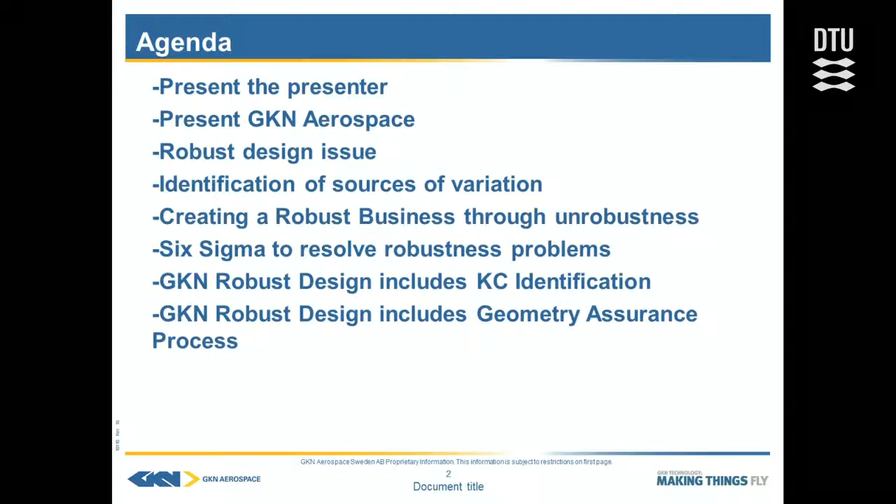So, Sören Knuts is my name, and this is the agenda for this talk. I will briefly present myself, and then GKN Aerospace, and then I will bring this back to basics regarding robust design and the robust design issue and identification of sources of variation. Then I will discuss our business where we see that we are creating a robust business through unrobustness, and I will tell you more about what that means for us. Then we have Six Sigma for resolving our robustness problems. And then we see the GKN Robust Design that includes key characteristics identification, but it also includes geometry assurance process.

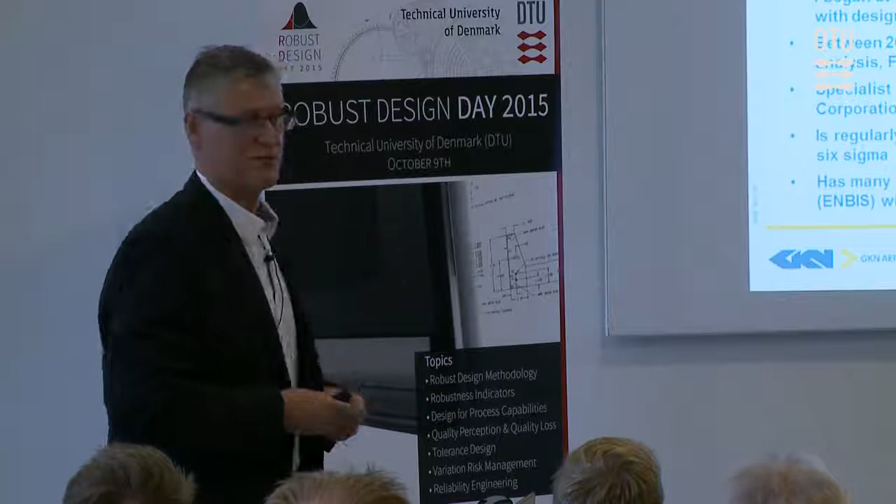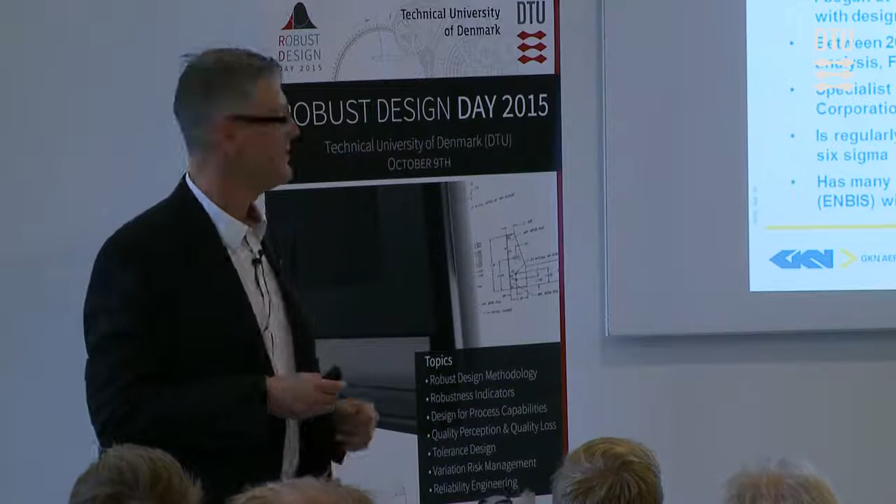But then I came to Trollhättan. I started with space propulsion, and there I also got very interested in quality issues and reliability. After being quite deeply involved in the development of the Ariane 5 nozzles, I continued to Saab Automobile, also in Trollhättan. There I continued working with risk analysis, FMEA, statistical analysis, and I started also with design for Six Sigma. Then I went back to Volvo Aero, where I started in Trollhättan, and continued more or less with the same thing, and then I became their specialist in design for robustness.

And now we are GKN Aerospace since 3 years back, a British company that I will talk about next. I regularly run master thesis works and student projects in robust design and Six Sigma, and I have also participated quite a bit in a European network in business and industrial statistics. There I have met a lot of people from Novo Nordisk, so I know they have a lot of good statisticians.

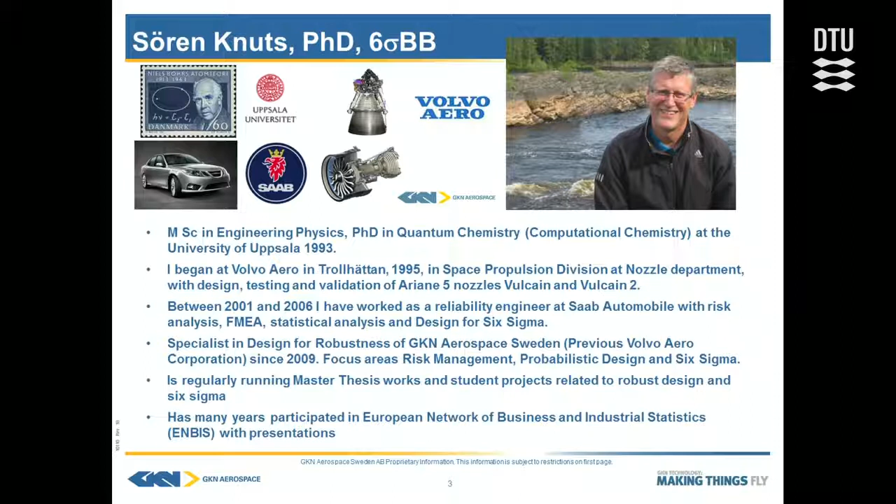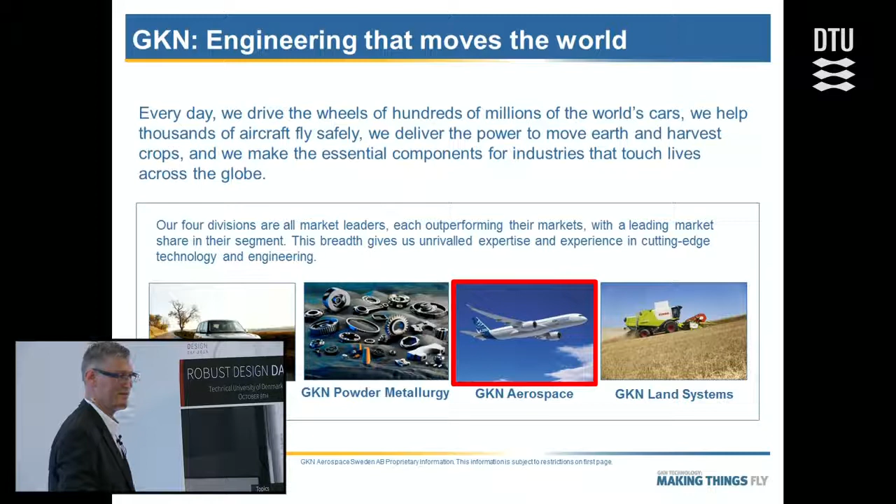So, GKN: engineering that moves the world. Here you can see that there is a great variety of businesses that we have, where aerospace is one business, and we are supplier to bigger companies. I guess Jaguar Land Rover is one, and Volvo is another one, I know.

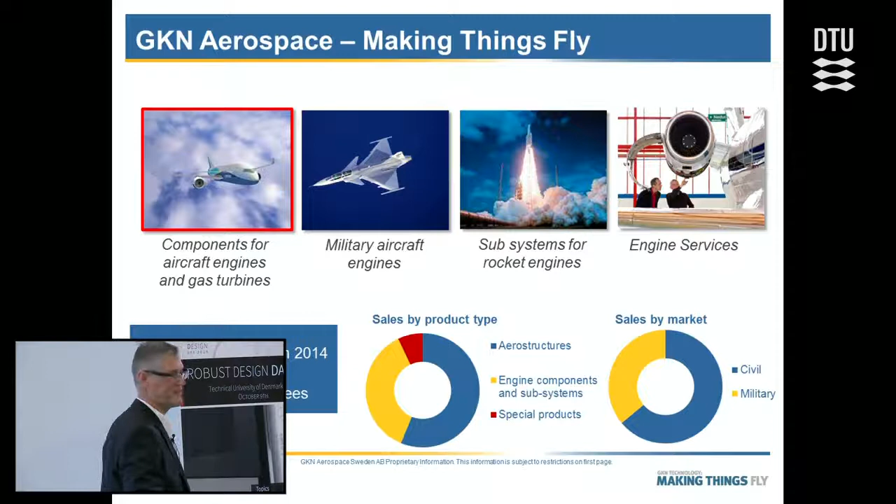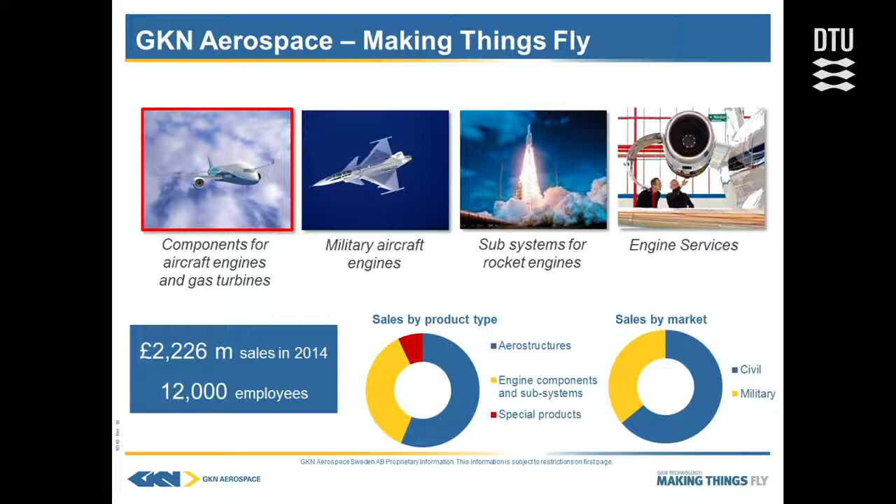And if we go to GKN Aerospace, making things fly, we see that there we also have a great variety of different businesses. I will mostly focus here on the commercial aircraft engine side, but we also have military aircraft, space launchers for Ariane, for instance, and engine services. We are about 12,000 employees, and in Trollhättan we are about 2,000 people.

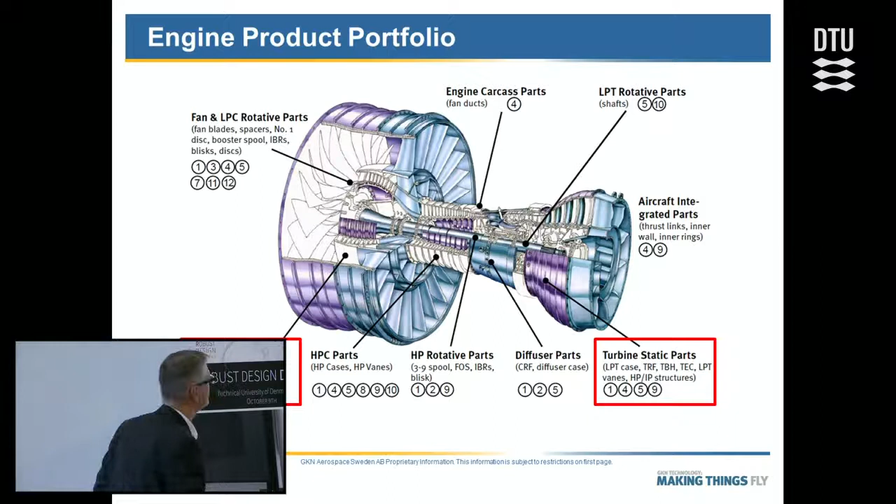Here you can see one of these commercial engines. We have specialized in having two parts of structures: one on the cold side, where we have the fan static part, and one on the hot side, where we have the turbine static part. So we do not have the moving parts—well, we have some moving parts, but these are the structures we have specialized on and made a very good business on, where we have more or less 90% of all the large commercial aircraft engines.

So when you are flying, you certainly are flying with components from GKN Aerospace. And then you want it to be very reliable, of course. So reliability is a big issue, of course, but robustness, that's where we are going to earn our money.

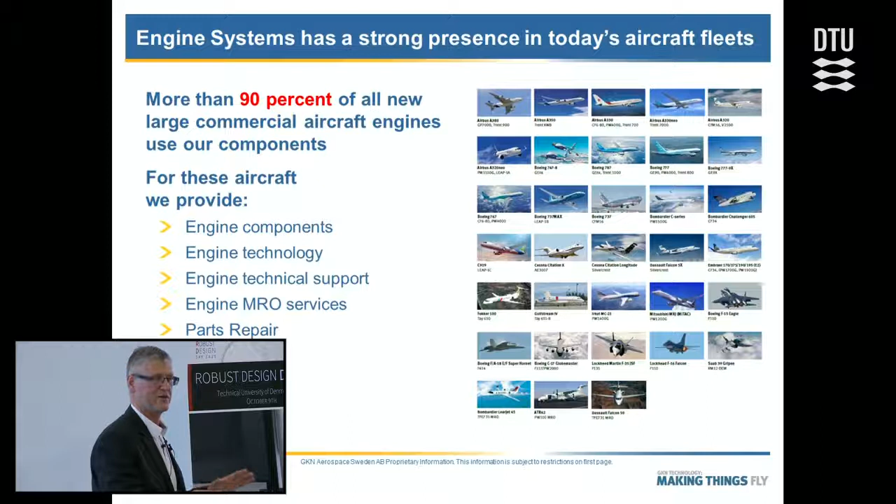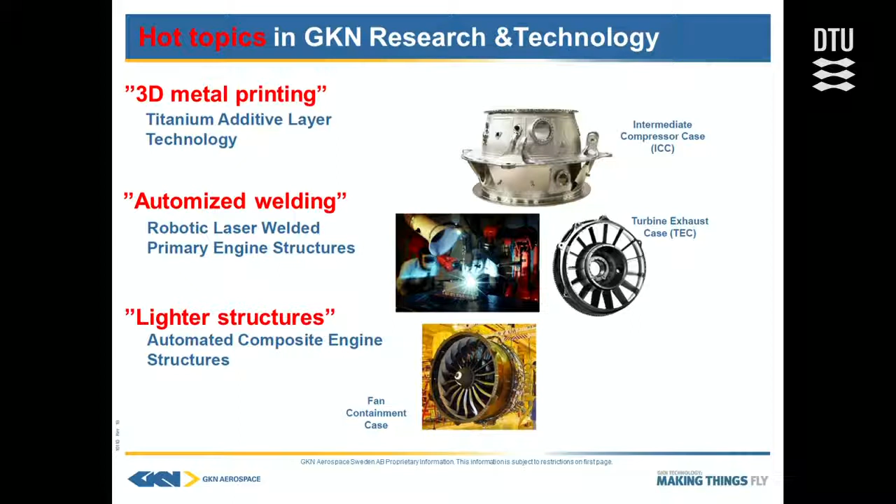And here you can see the hot topics within GKN Research and Technology. You can see that 3D metal printing, or building up parts by additive layers of metals, where we are mostly welding—that is one important technology that we are building up. And we have the automized welding, welding with lasers—that is also a very important technology we are building up.

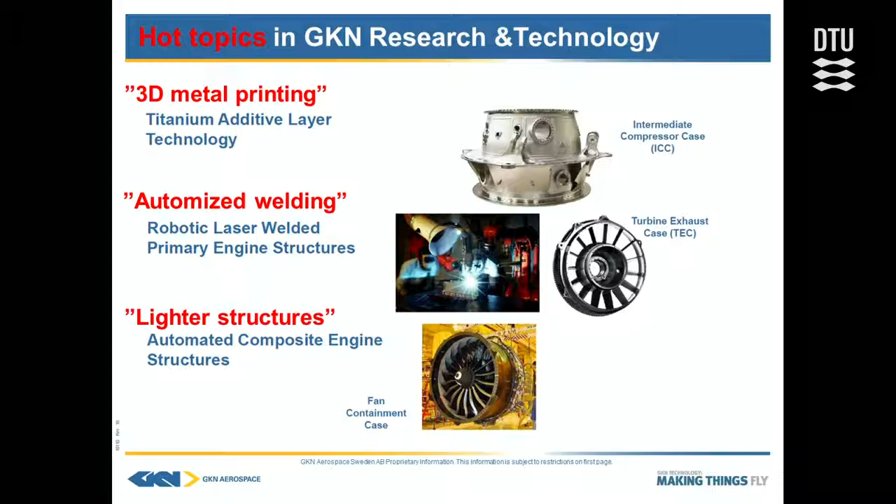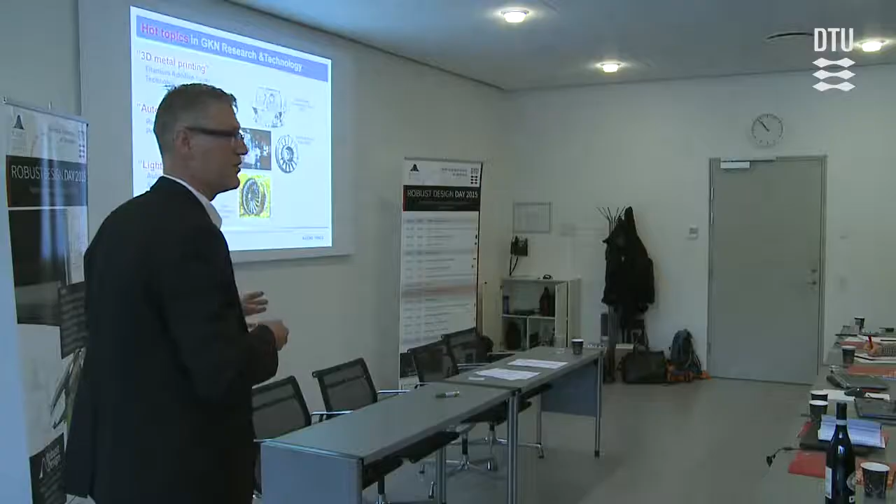And then finally, we have the lighter structures and introducing composite materials in engines. So far, I don't think there are so many composite materials in aircraft engines, but they are on the way. They have not yet matured enough.

So what is the robust design issue? The main issue, and I think that was touched on very much yesterday in the doctoral thesis, Martin.

This is very much what we have been trying to develop here for the last 7-8 years: can we design our products and processes so they are insensitive to sources of variation? But here it's very much to understand what this means for the type of business we are in, because it's not the automotive industry.

Here we have an industry with much fewer parts. It's not consumer parts in the same sense, but the high requirements we have in our business also put a lot of constraints on what we can do.

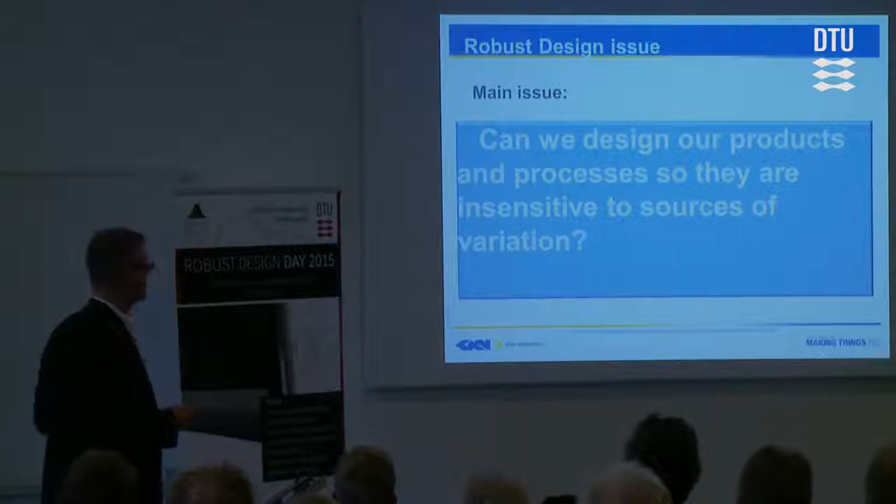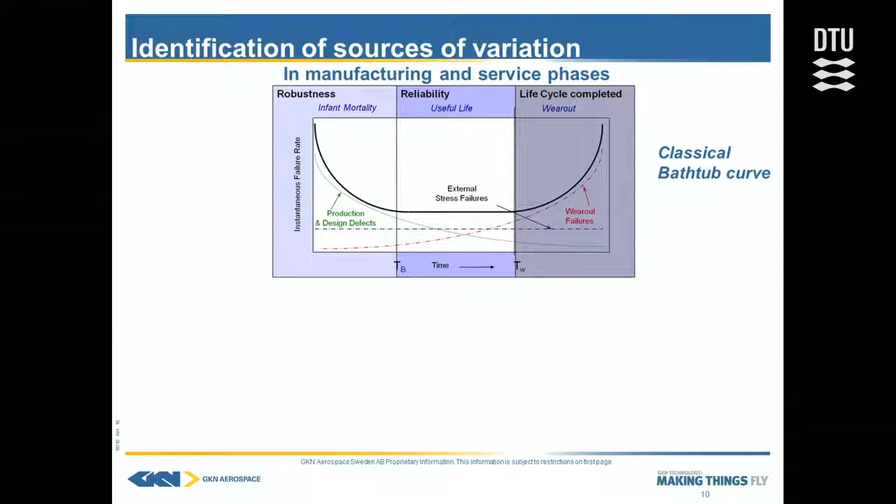If we look into this classical bathtub curve, we have divided it into three phases. The first phase we call a robustness phase, the next phase we have reliability, and then in the last phase, the wear out phase, we are not operating. So what we are determining there is rather to estimate the life of the parts, so we have margins.

A lot of focus is put on the reliability part, but when it comes to earning money and creating good conditions for our products, the robustness phase is what we have to focus on. I have been very much focused earlier on reliability, but I have to shift here.

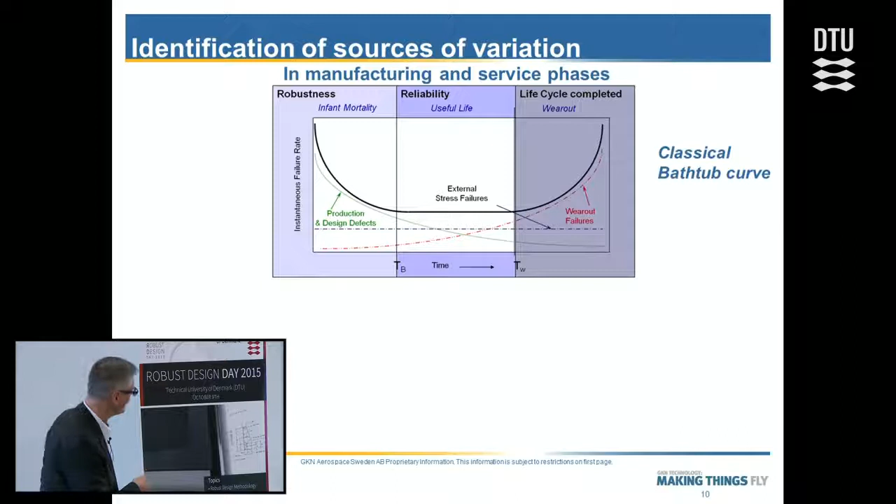There you can see typical noise factors related to these different phases, and manufacturing imperfections - that's really what we aim for when we are discussing robustness. The other noise factors you can recognize for typical consumer products regard external environmental load conditions and customer behavior.

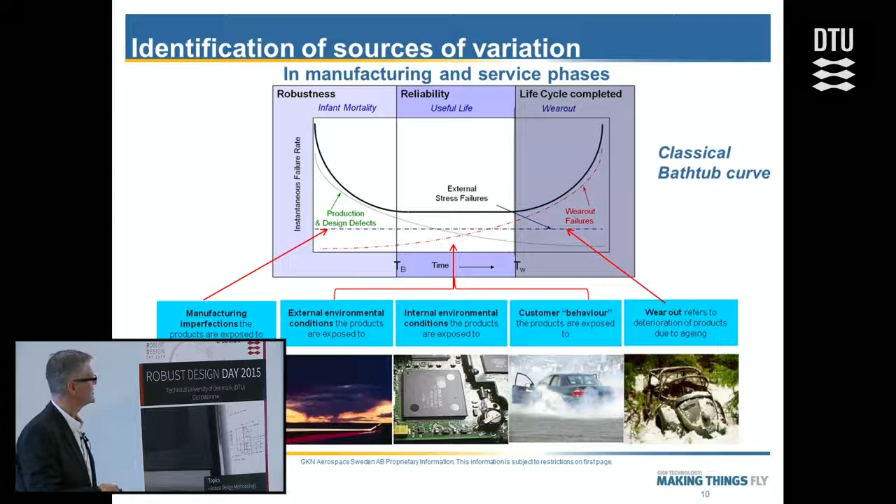So we continue with manufacturing imperfections. When we work on identifying these sources of variation, we see the type of problem that Martin was facing yesterday in his dissertation thesis was very much how can this be applicable in a simple way for the engineer. What we can see is that in our organization, we can talk about these tools, but what the engineer is doing is using FMEA, and in his FMEA he's not addressing the sources of variation. There we have the problems.

We see when we work with root cause analysis that these fishbone diagrams or Ishikawa diagrams are very fruitful in order to map out different factors.

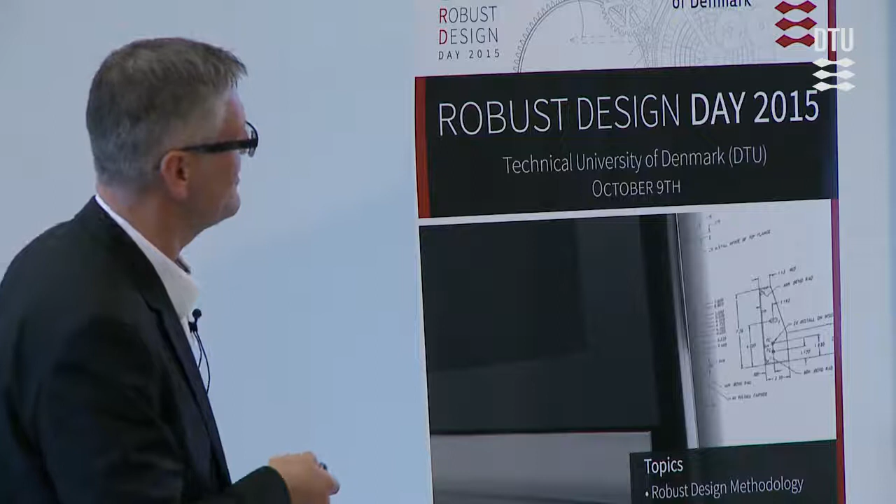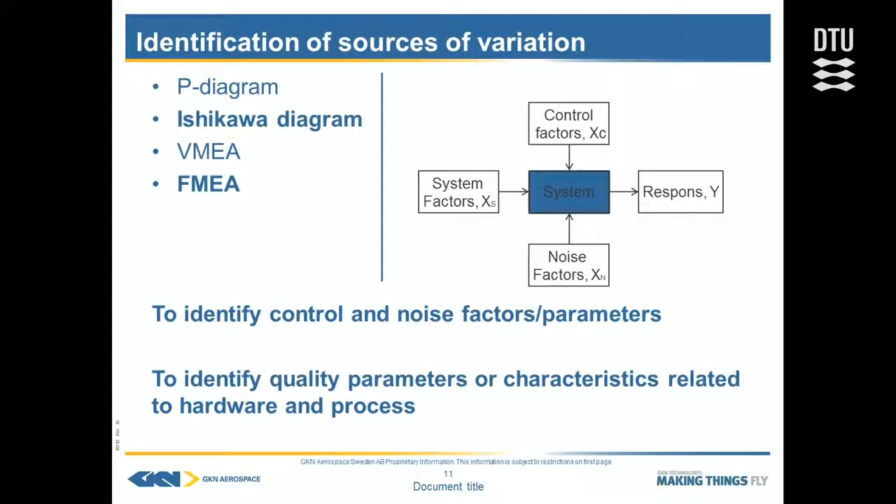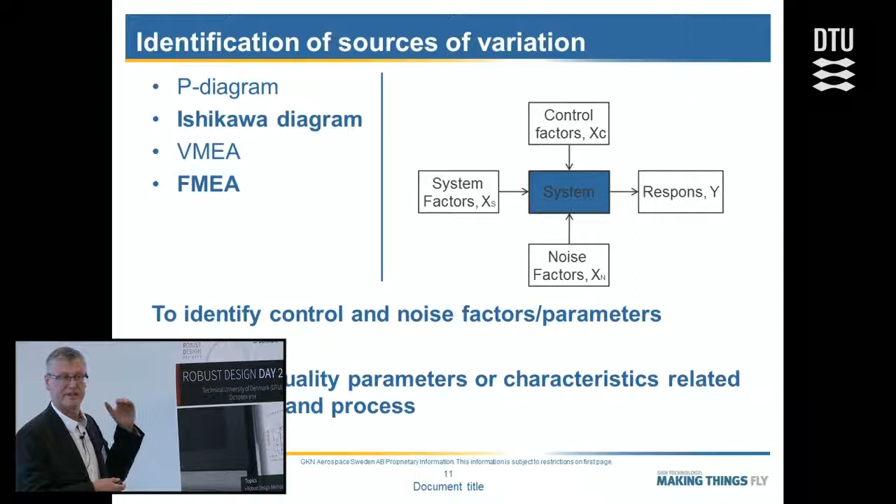What I have used here is really a P-diagram, and I think that's a good way of understanding what type of problem you are really facing, that you have to differentiate the factors in your engineering problem and understand the system you are studying. Then the question is very much about control and noise factors, but you can also talk about quality parameters or characteristics related to solving this problem for both hardware and the industrial process. So you have to connect these two.

The GKN design problem is very much this: to find the key product design and process parameters, but also to understand the voice of the process. There I would say we have the noise factor that we have to get more and more aware of - the tolerances that the process is creating. The tolerances we set in design are not always connected to what the actual process says. We have some big issues there to work with.

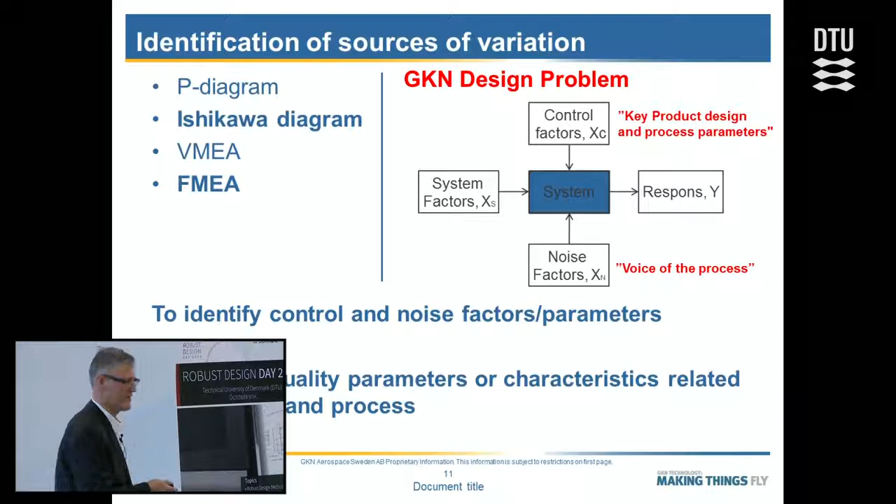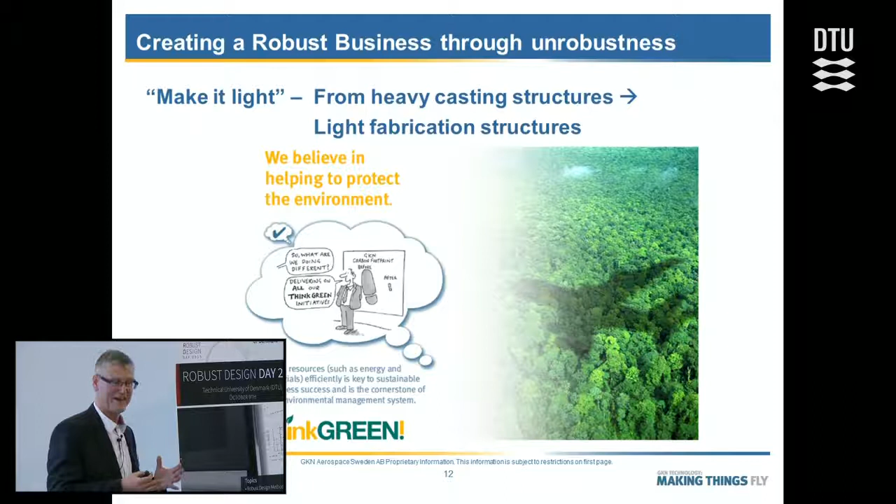So how are we creating a robust business on our products? We are actually creating unrobustness. And why are we doing that? That's kind of a strange thing, and I have gotten comments on that before - how are you thinking, you should do robust design, and now you make things unrobust.

But that's a competitive thing, because what we want is to go from these unit or one-piece castings that are very heavy and big to smaller pieces that we can control the weight on and get to a much lighter fabrication. And from this we can talk about 'make it light.'

And there starts our travel. We should provide light structures for our OEMs, our aircraft customers.

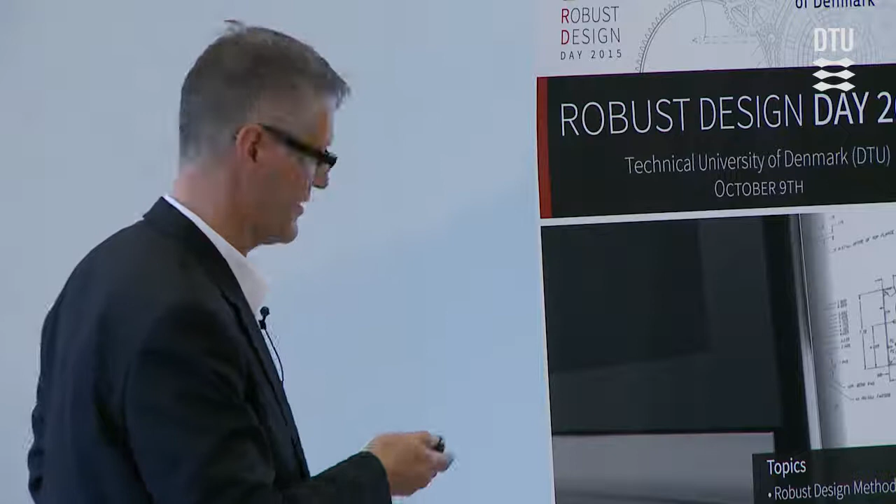So we have this Think Green initiative within GKN, and sustainability is one of these big issues concerning this. So what have we done? What we are doing is actually partitioning these big structures into much smaller parts.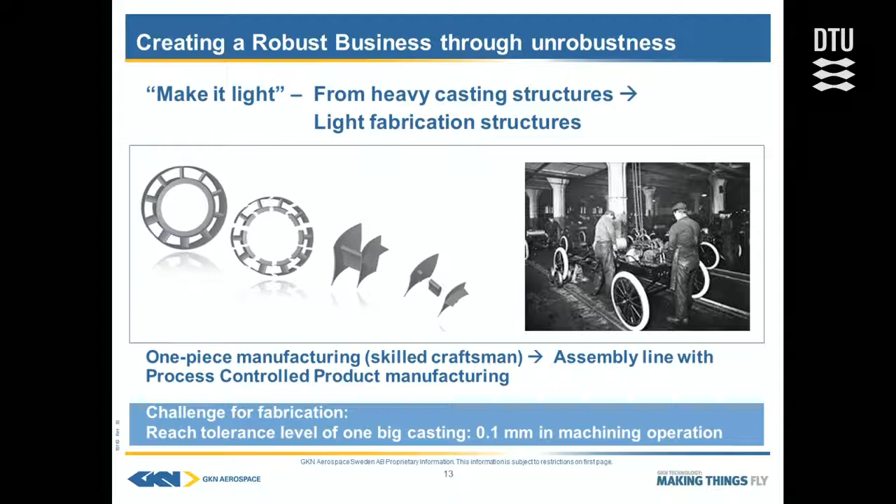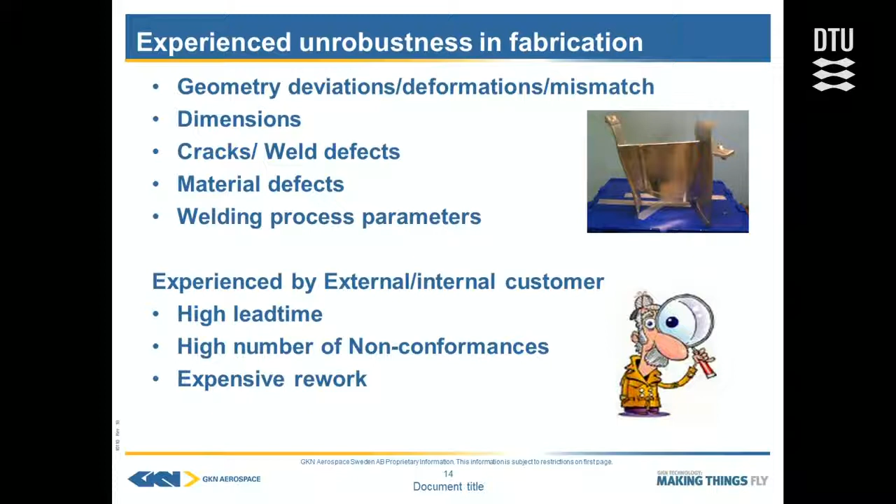So what type of unrobustness are we facing when doing this fabrication? What do we have to care about when developing our structures? We have to care about geometry deviations, deformations, and mismatch, and that comes very much from how we assemble all these small parts.

Then when we are welding, we get deformations from the heat-up of the material. So how can we control this? We are very good at simulating even welding, but anyway, we are not precise in how this is done.

So dimensions are important. In the welding, we get weld defects, cracks, that we have to control. We also have to show by inspection that we don't have defects in our welds. So it's very much about how we can show that our processes are defect-free.

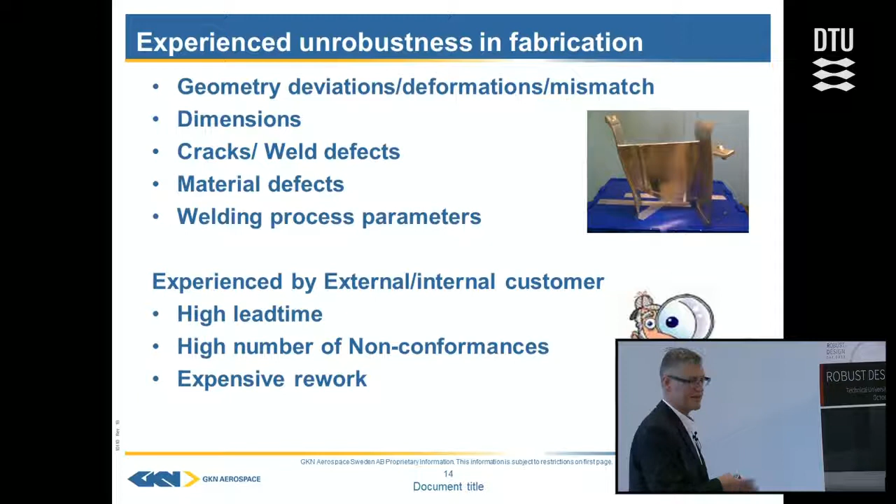Then it comes to the material that we are using. Castings have slightly worse quality than forgings and sheet metals. And then, of course, how are we controlling our process, all the welding process parameters that we are applying.

You can understand that this adds up to high lead times, a high number of non-conformances that cost a lot of money for us, and we also have expensive rework when we have to do rework.

So here it's very much about working with the manufacturing process at the same time that we have to work with the product. You can understand that we have gone from having no identification to now being very much into the identification phase, where we understand how different factors are varying together.

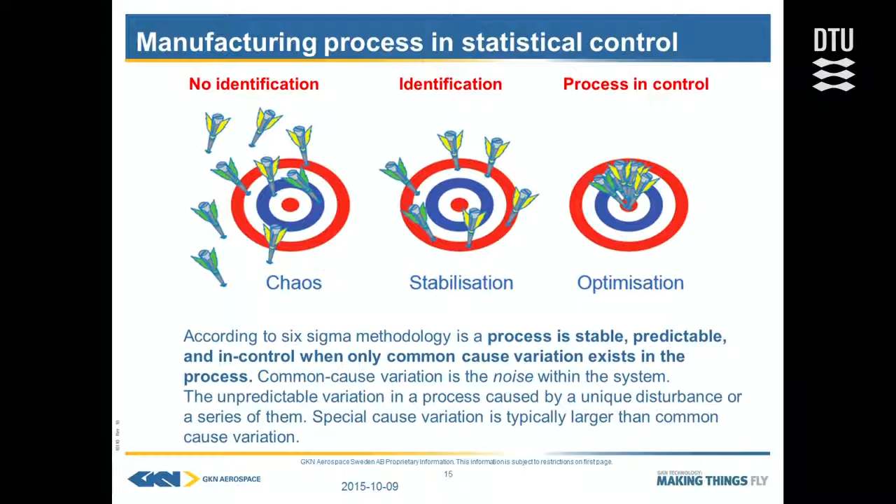But we have to go into process control. We have to get a very accurate description of how we can get robust products and processes. And here we also see that the Six Sigma methodology has helped us very much in the way of thinking regarding how we work with production processes in order to get this optimization happening.

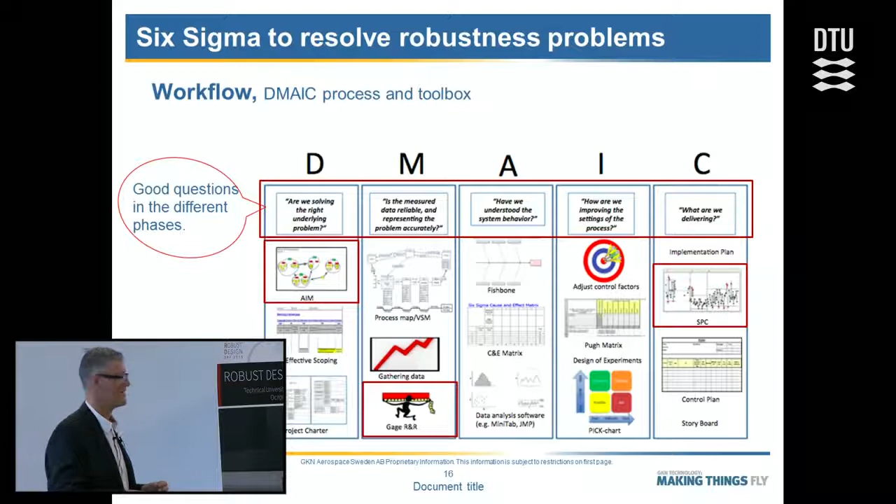I want to show you briefly the DMAIC process, which I think has some very good components that you have to get the engineer to understand when it comes to controlling the output of your process.

I want to stress the aim, where you have to look at the problem. You have to question whether you have defined your problem in a very good way so you can solve it. What we mostly see is that you have not looked through the context or made the analysis - you try to find simple solutions to the type of problems you are seeing.

That is something we question and work with in a very good way in this Six Sigma methodology. And then we also see that when it comes to working with measurements, we haven't really made our exercise concerning the measurement system analysis. That is also something we are working to correct.

And then, of course, to really study the process and study how the deviation looks, so we actually reduce the variation in a wished way.

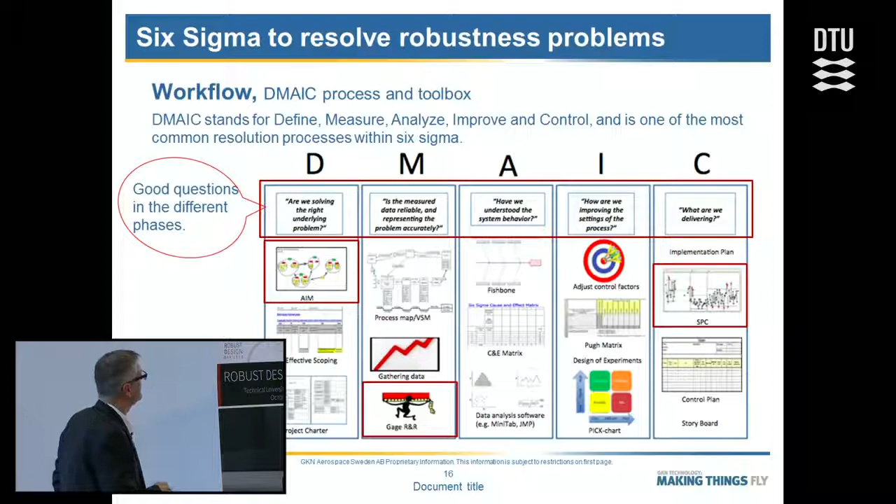I want to connect here from the sense of measurability to the concept of key characteristics. In the academic literature, this is a quantifiable feature of a product, its assemblies, parts or processes whose expected variation from target has an unacceptable impact on the cost, performance, or safety of the product. That's a reference to Anna Thornton, who is here today.

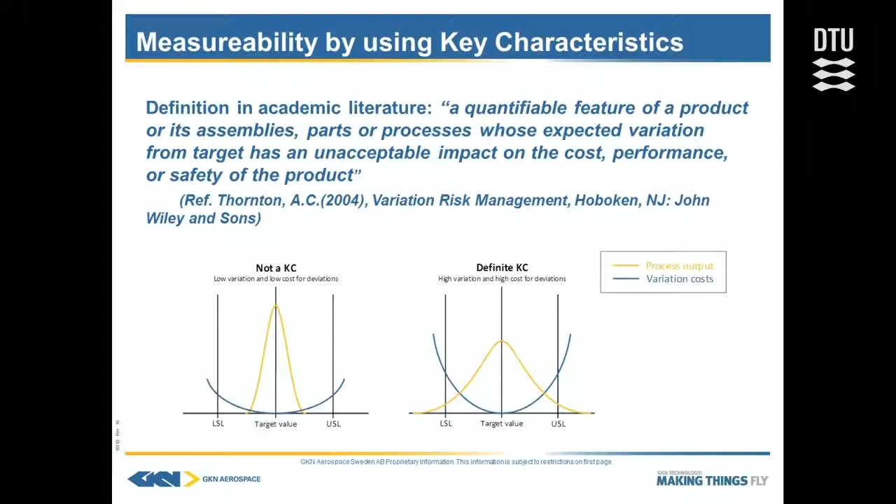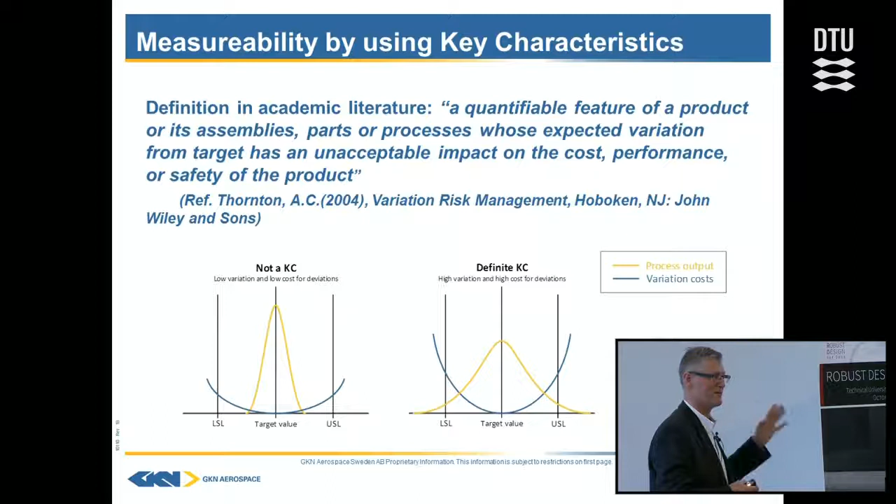I think this is very fundamental work in variation risk management that really gets to the point of what is robust design. But it's very fundamental, so from that point of view it's sometimes a bit hard to apply, a bit theoretical.

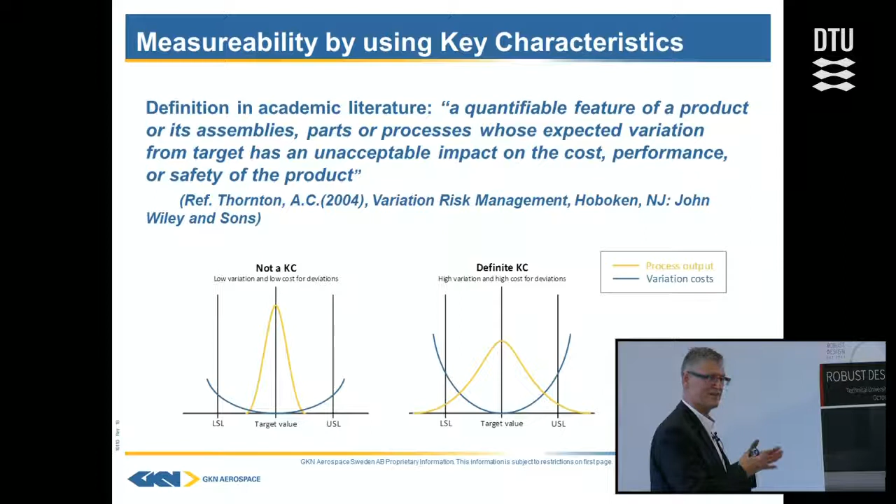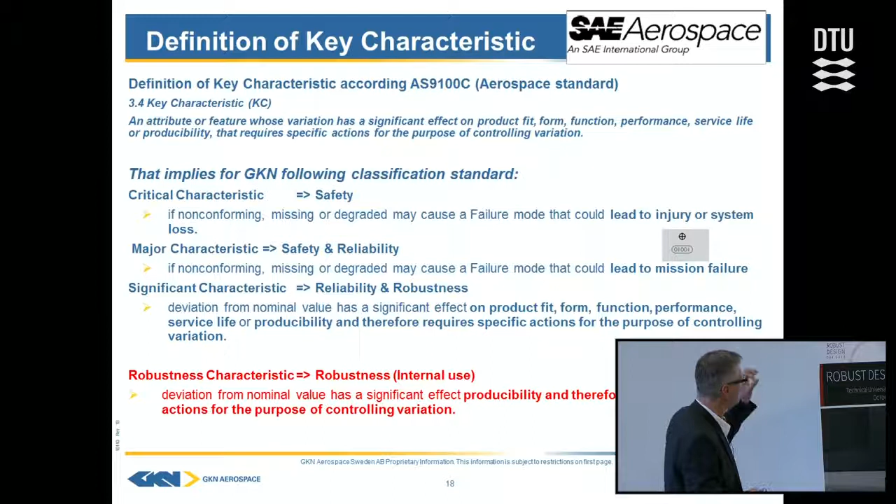What we see from our customers is that the definition of key characteristics exists within the aerospace business. This is something we have in our aerospace standard, and the definition is very similar to what Anna Thornton put forward, with the purpose of controlling variation, and where we put a lot of emphasis on producibility.

But what we see when applying it - and we have made our own classification standard on this in order to really understand the problem - is that our customers also put their own definitions. And here comes the problem: when you do these interpretations, you are moving away from robust design.

So when we try to work with these concepts, it's not always robustness you see when handling key characteristics. That's something I'm kind of fighting for in the organization, to get some kind of mind shift on this concept, because it could be used in a better way for robust design purposes.

Therefore we have also proposed to have some kind of characteristic that we call a robustness characteristic, that lifts the internal use and internal need for actually measuring in production, to have good measurement data input when we are working with producibility issues.

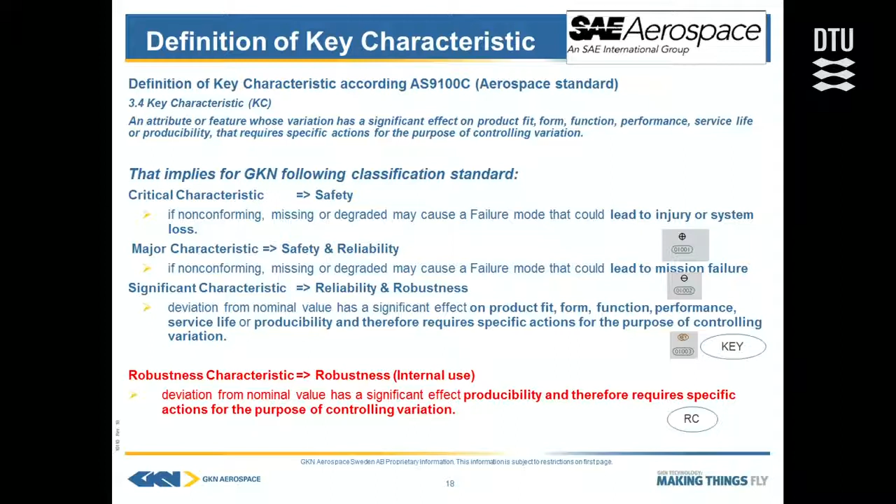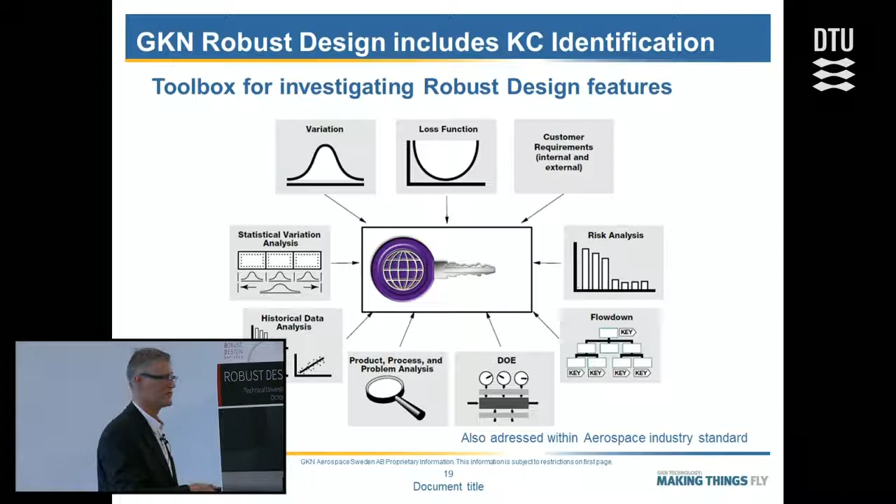I would say that is also addressed within the aerospace industry standard. So this is not something unique for us, but it is addressed there, though we see that maybe it's not so well developed as you could think - but that's where we want to go.

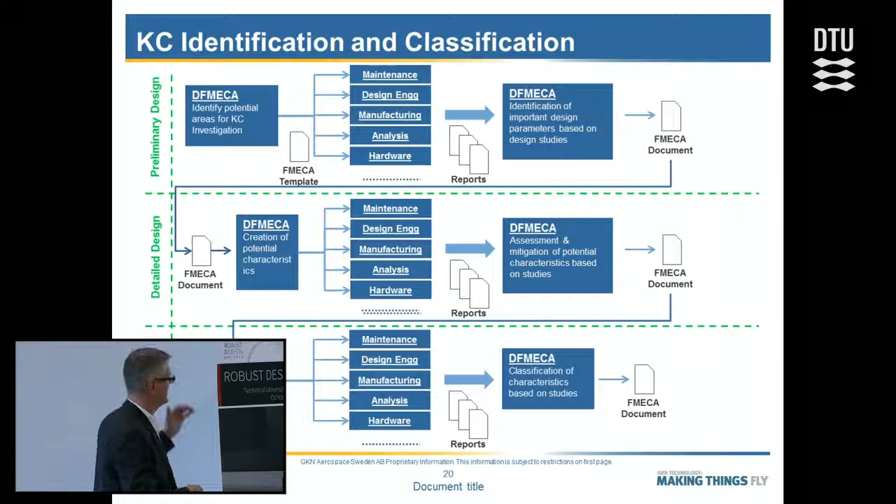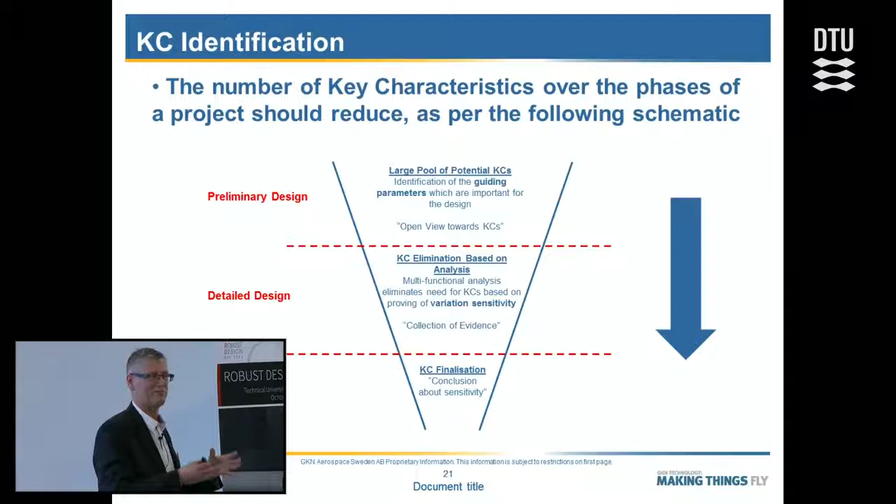In different phases we have different goals. The main principle is that it should start with a large pool of key characteristics in an early phase, and then we work with eliminating these key characteristics and sensitivity by doing activities. It's very much about how we collect evidence that we do not have sensitivity, and then finally we should come to a few key characteristics.

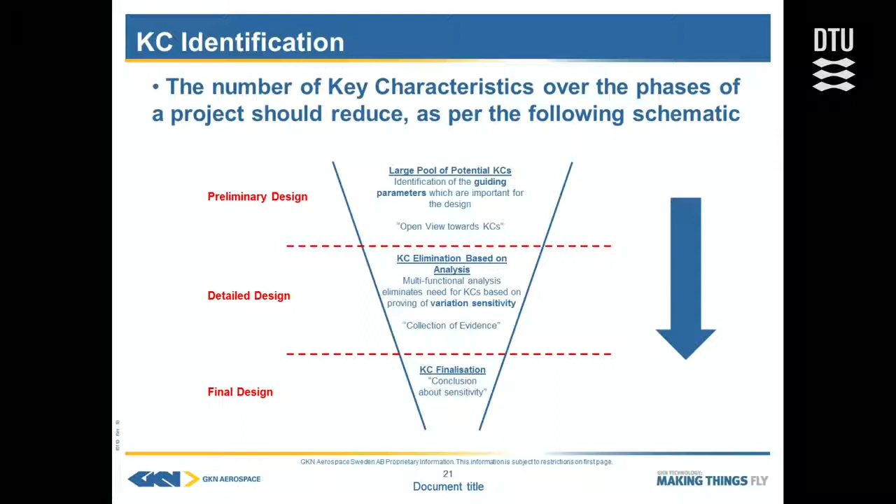Am I a bit short of time here? Maybe I should speed up - 5 minutes? 5 minutes, yeah, so I will make just some brief conclusions here.

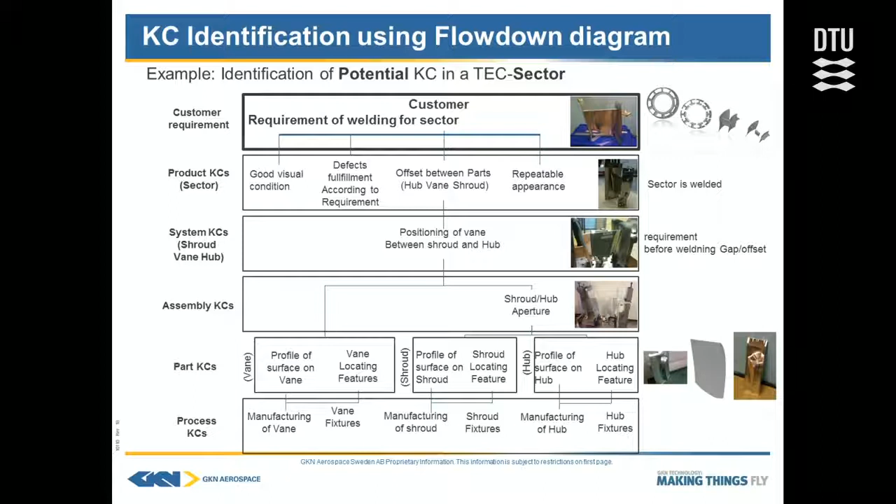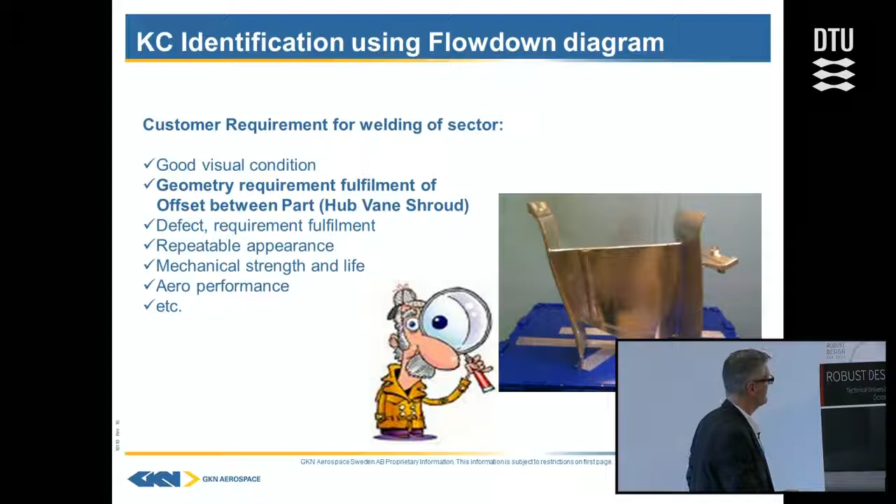Here we have one picture on key characteristics, and there we have one sector, and you can understand that it's in this chain, with customer requirements put on it. If we go down here to the offset between parts, you can typically find these characteristics on such things. Here we have the offset on a drawing that could be put as a key characteristic, and first we have to put it as potential in order to work with it and get data.

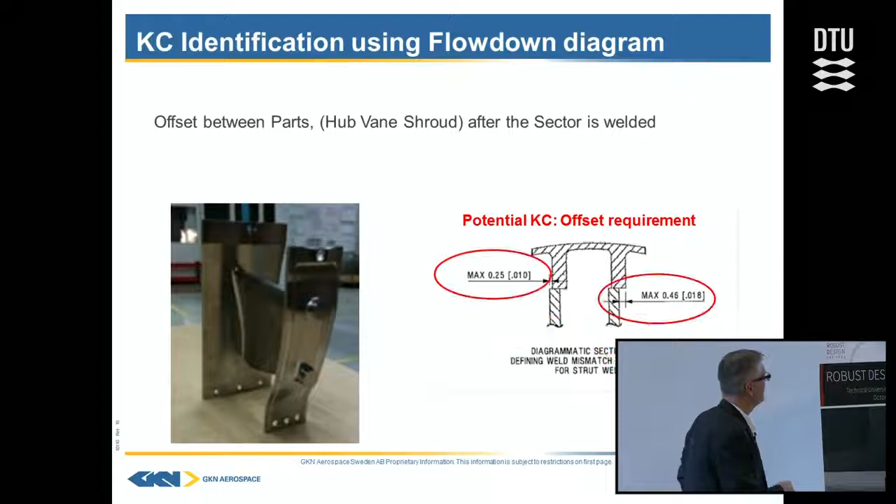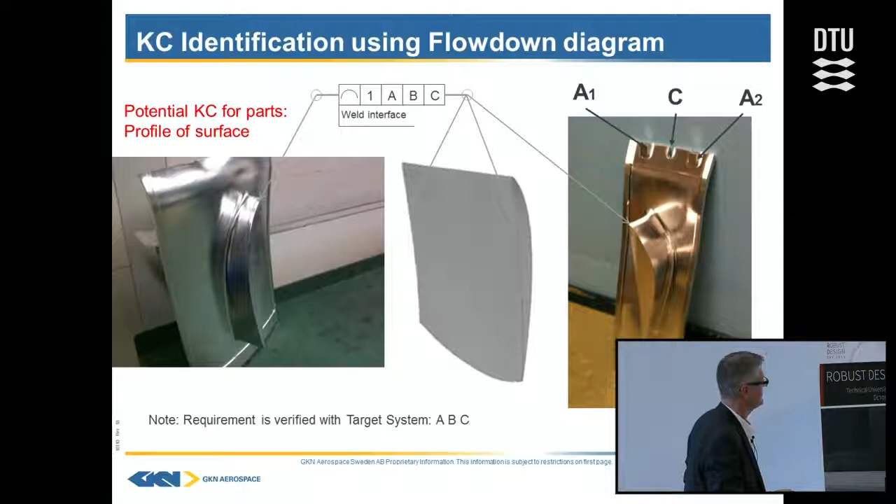Here you can see other characteristics on the aerodynamic surfaces, taken with a target system for this measurement. Then I want to move over to the geometry assurance process, and there we see that we have the RD&T as our tool.

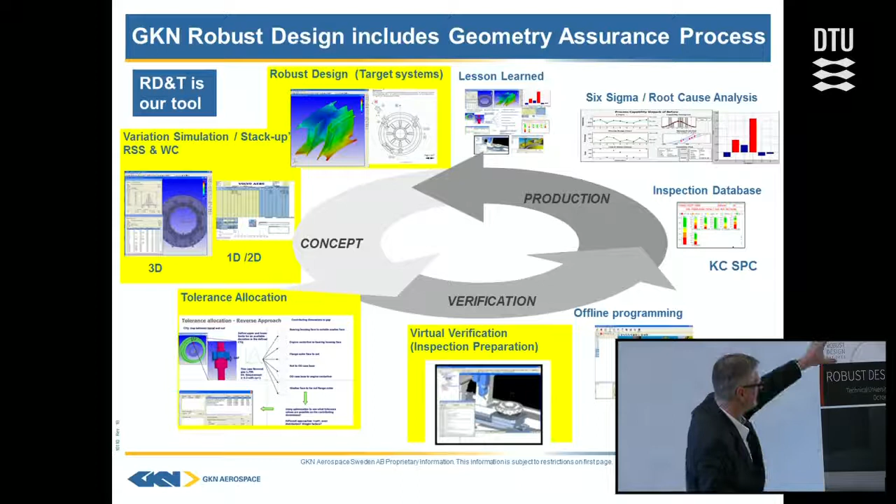And there you can see these are typical activities that are being run with the RD&T when we do work here. And also there we are finishing the loop with having Six Sigma work, a root cause analysis whenever we need to correct.

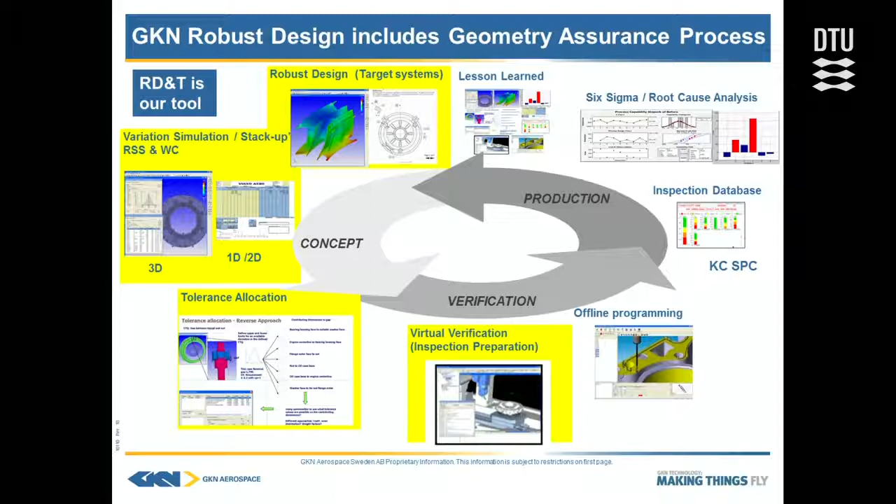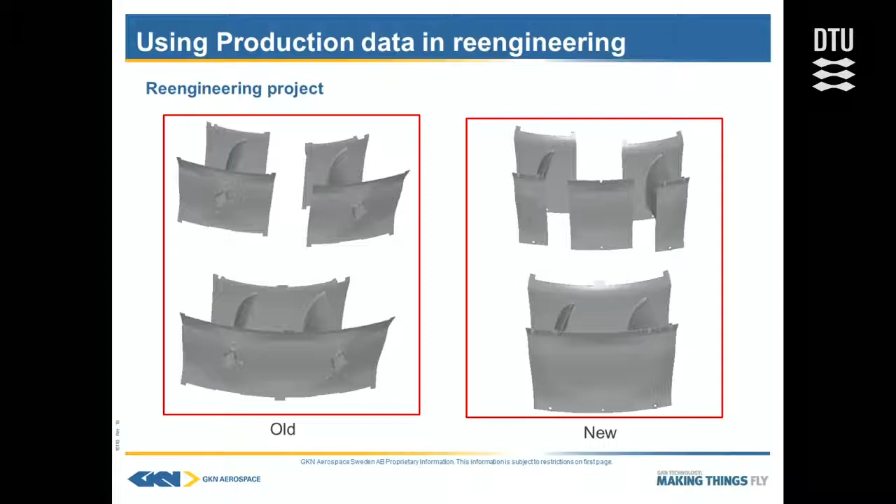And here we have an example where we have a reengineering project, where we have an old way of designing the way we are joining two sectors. And then we go to a new way of designing this. And there we also have to address what type of requirement we have, key characteristics with weld offset.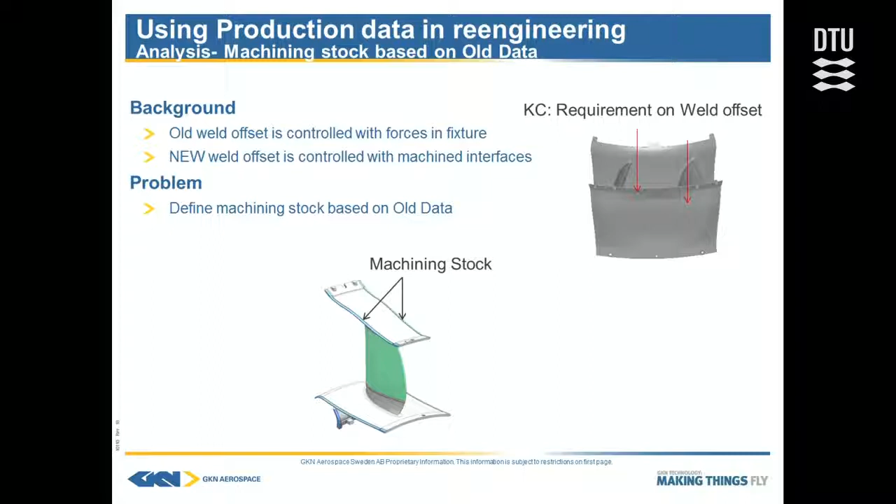And here we are addressing, we are going from actually controlling the weld offsets by forces in a fixture, so there we build in tensions and stresses in our structure, to a new way of controlling these interfaces by machined interfaces, since there we can very accurately control the dimensions. As I said, 0.1 millimeter we can do with machining. So there we have an accurate process that we can use.

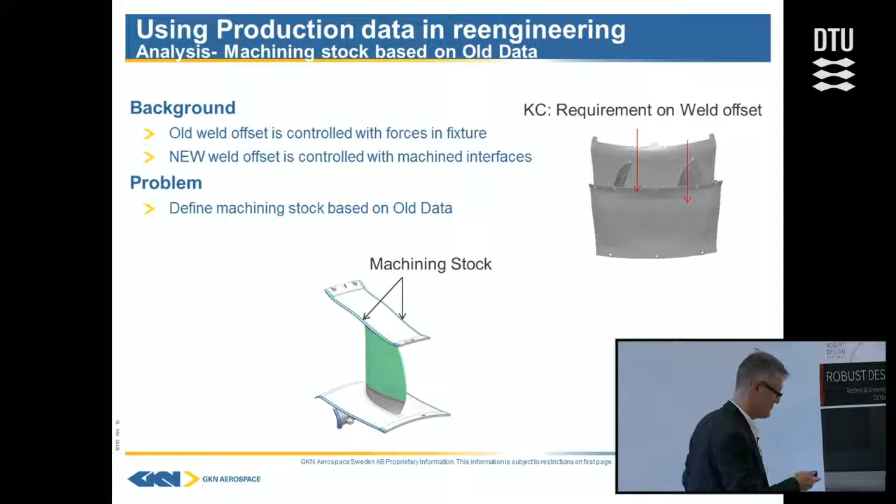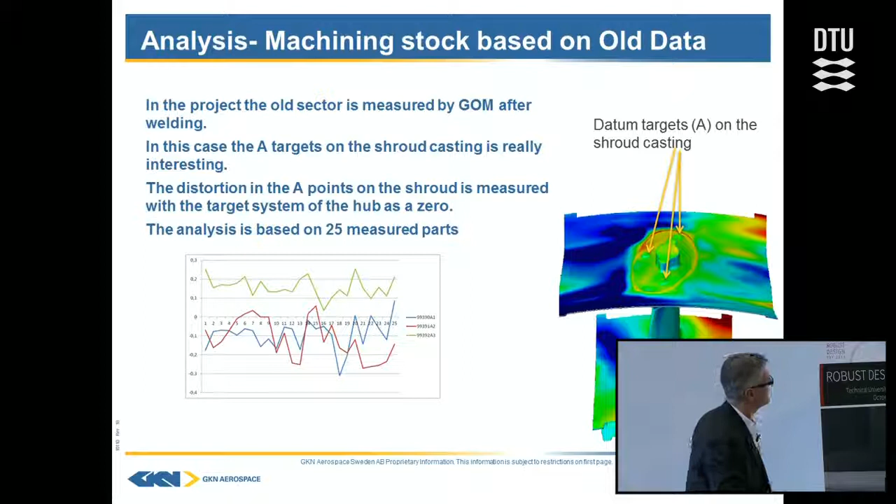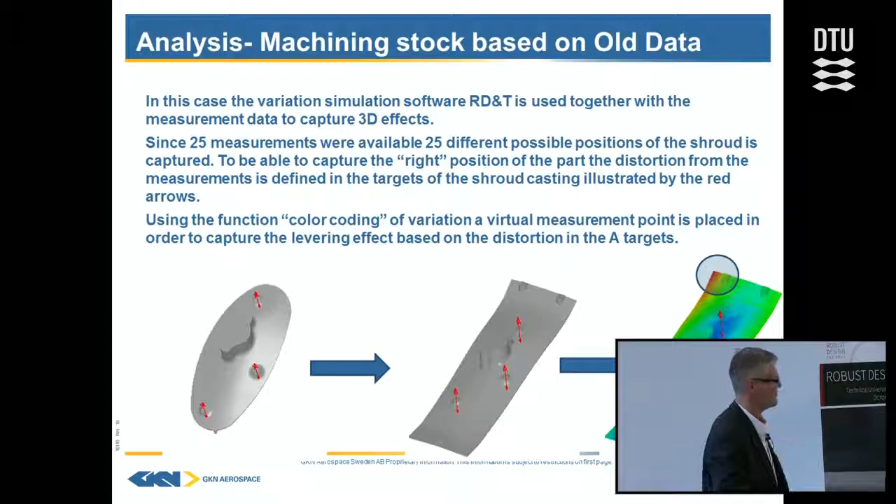And then here it shows some results from how we use geometrical optical measurements in order to measure variations. And here we have actually used the RD&T software in order to simulate the variations and being able to compensate for the variation we have in the structure.

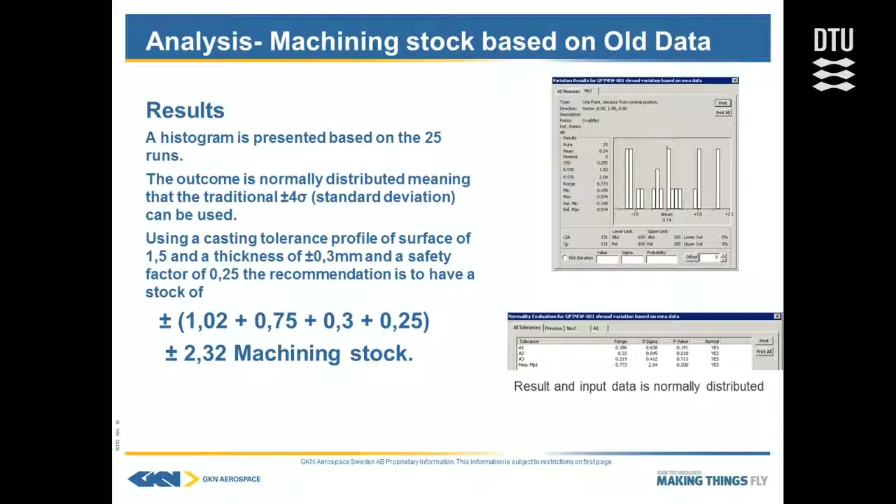And then here we actually do the compensation. So we build up materials in order to machine it later on and correct for the geometry.

So what the GKN robust design process is making things insensitive to variation. And there we see typically a risk process with identification, assessment, and mitigation. But we also see the importance of addressing measurement system analysis and SPC, and then having this recovery whenever it's needed by being able to run root cause analysis, Six Sigma work.

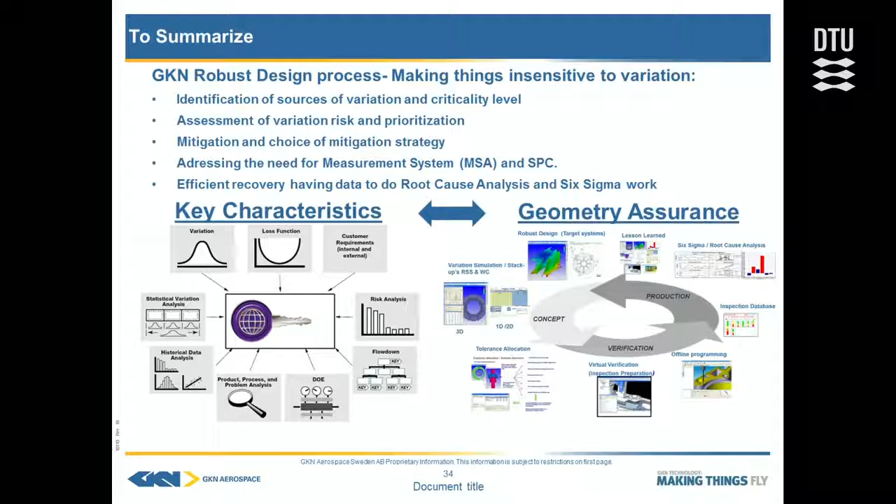And there we have both key characteristics and geometry assurance involved, and that's what we are trying to implement in our system or work process. So thank you all for listening.

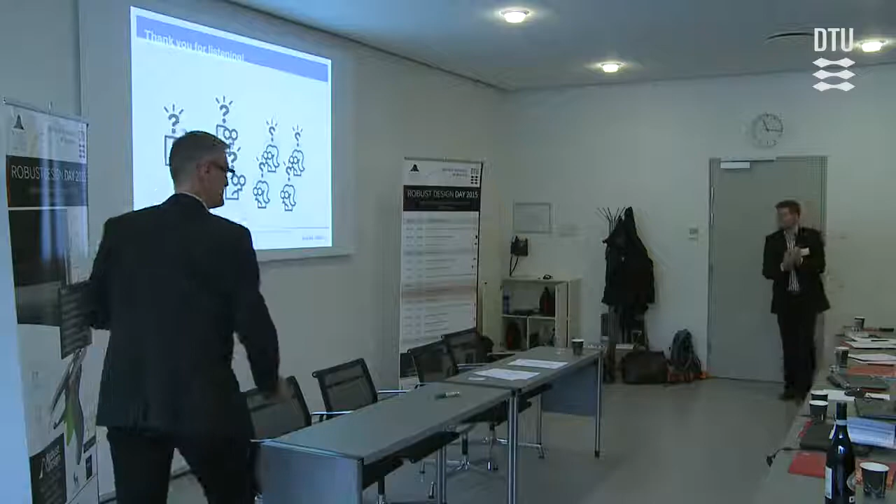Two quick questions. I saw a lot of effort to handle existing design and avoiding problems here. I didn't see a lot of indication that you actually try to design in a way so that you will put all this out of work.

As I said, we are creating unrobustness. That's one of the problems. So now we have to take it back. We have to try to make the unrobustness robust.

How do you challenge the designer to make design solutions that doesn't really need a lot of what you did there?

I would say that what I showed here in the end, where we have actually recovery, we know our problems. I would say this fabrication method is only just a bit more than 10 years old, and from this we haven't really collected so much experience and data. And that's what we are starting to get now, and then it gets more clear.

And as I said, we are working much with the measurement systems to really get the right data out of the system. And there we have to mature the engineers in really questioning this, because they have taken so much for granted regarding how manufacturing is dealing with taking measurements and trying to fulfill really our needs.

So here it's very much to work with problems, but also to be proactive for the next engineering loop of product. So we're actually building in these systems that make it possible for us to recover in a good way and in a fast, efficient way.

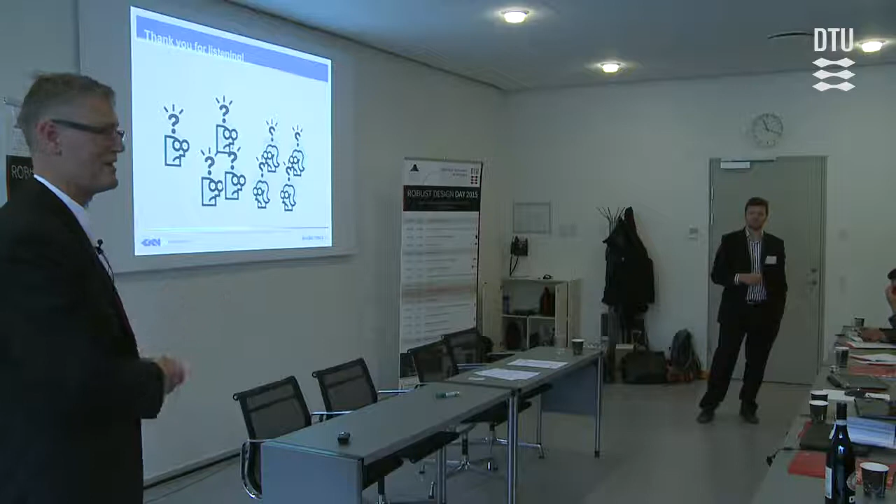And that's really one of my messages here, that think about the measurement systems where you can recover from having problems, so you more easily can make things more robust.

I'll take one more from Robert. Yes,

Martin's PhD thesis yesterday, and also some of the parts from today, has focused a lot on reducing overconstraints in your components. Do you believe that it's possible in something like an airplane engine to take away these overconstraints to actually reduce the number of needed measurements and tolerances and tight fits?

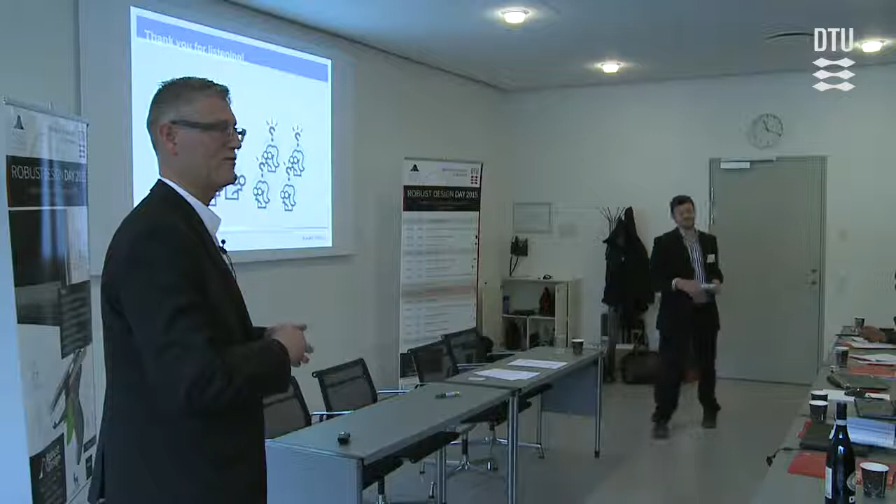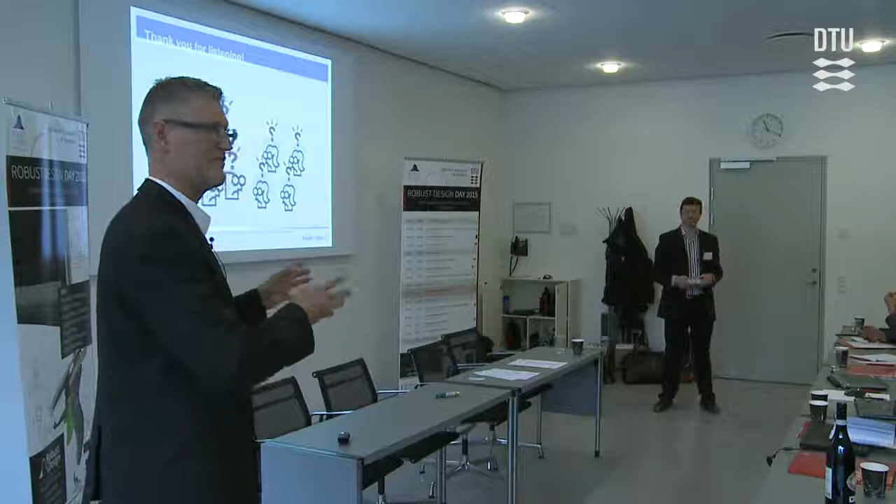So I haven't made a big analysis here regarding overconstraints, but I see what the geometry assurance process does for our product is very much to give the engineer insights into how variation is affecting your product. So from my point of view, it's rather to involve geometry assurance much earlier, and the way we are addressing target systems, reference systems in how we are building up our product.

Okay, Sören, thank you very much for your interesting talk. So thank you.